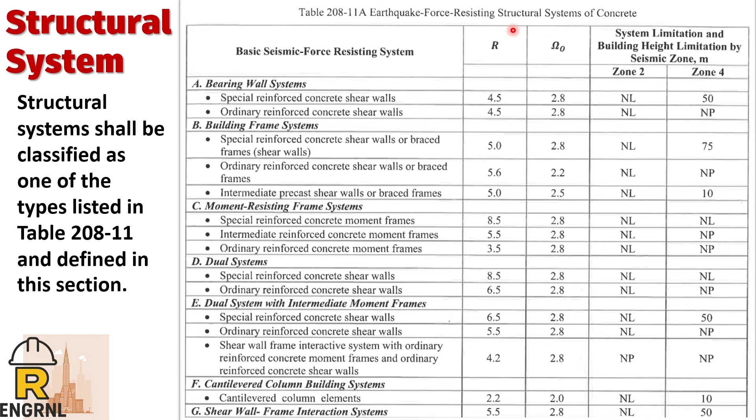So, structural system shall be classified as one of the types listed in Table 208-11. So, meron tayong bearing wall, building frame, moment resisting, dual system with intermediate moment frames, cantilevered column, and shear wall frame. Yeah, and usually nga, ang ginagamit natin is the special reinforced concrete moment frames or yung 8.5 na R sa pag-compute ng earthquake parameters. Isa-isahin muna natin i-introduce ito sa inyo para maging familiar tayo.

So yung una is bearing wall system. The structure without a complete vertical load-carrying space frame. Bearing walls or bracing system provides support for all or most gravity loads. So kinuha natin to sa NSCP as reference, itong definition mismo ng NSCP. In short, yung bearing wall mismo ang nagkikerry ng load. Sample of bearing walls ay yung shear walls, no? Doon sa floor na lahat ng gravity loads ang dinadala niya. Resistance to lateral load is provided by shear walls also and brace frames. Okay? So, madalas itong ginagamit sa mga high rise natin.

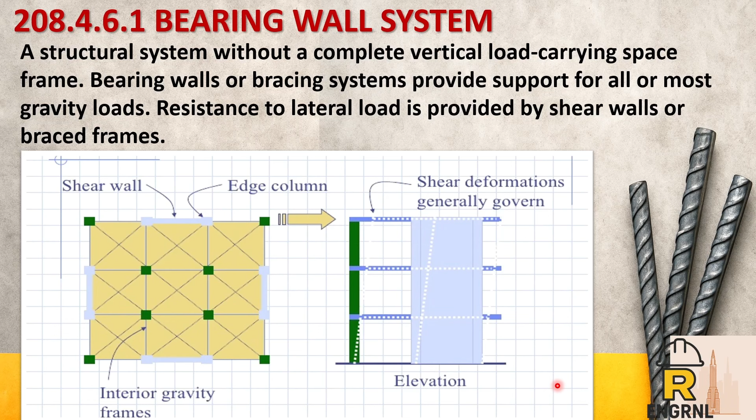Pangalawa nga is yung building frame system. A structural system with an essentially complete space frame providing support for gravity loads. And resistance to lateral loads is provided by shear walls and brace frames. So, technically, meron din siyang shear wall. Pero unlike the bearing wall, kasi ito, bearing wall is load-bearing walls na tinatawag. Meron kasing non-load-bearing walls. So dito, wala tayong specific na load-bearing walls, pero may shear walls for lateral load. Technically, ang nagbubuhat dito ay yung mga beam to column frame na.

Okay? So a building frame system is a system in which the gravity loads are carried primarily by a frame supported on columns rather than bearing walls. Ayan yung sinabi ko. So some minor portions of the gravity load may be carried on bearing walls, but the amount so carried should not represent more than a few percent of the building area. Okay? Kadalasan din itong makikita sa mga buildings with elevators. So ito na yung pangatlo na madalas talaga natin ginagamit.

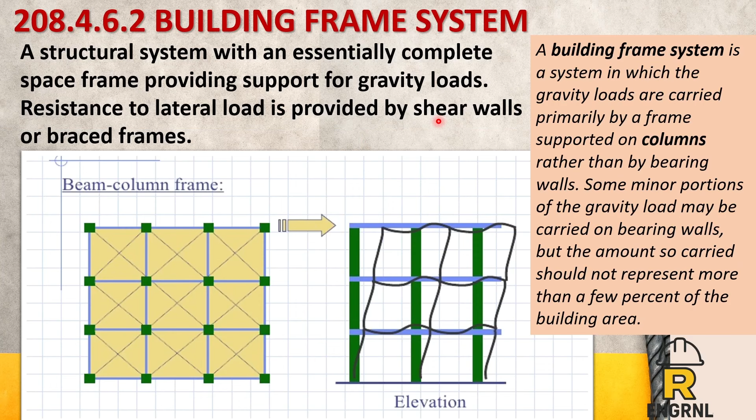So, structural system with essentially complete space frame providing support for gravity loads. A moment resisting frame. So, para rin siyang general under the building frame system. Pero this time is, from the word itself, moment resisting. Moment resisting frames provide resistance to lateral loads, primarily by flexure action of members. Kung dun sa building frame system, yung lateral load, inaasa natin sa shear walls. Dito, kahit walang shear walls, may resistance tayo sa moment. And nagkakaroon lang naman din ng moment kasi due to lateral loads, di ba?

So, the horizontal beams and vertical columns provide support for the structure's weight and the strength and stiffness needed to resist lateral loads. So, stiffness and strength are achieved through the use of rigid connections. So, lagi ko sinasabi yan, when the connection is rigid, you can call it moment resisting. May tatlong force dyan na general force: axial, shear, and moment.

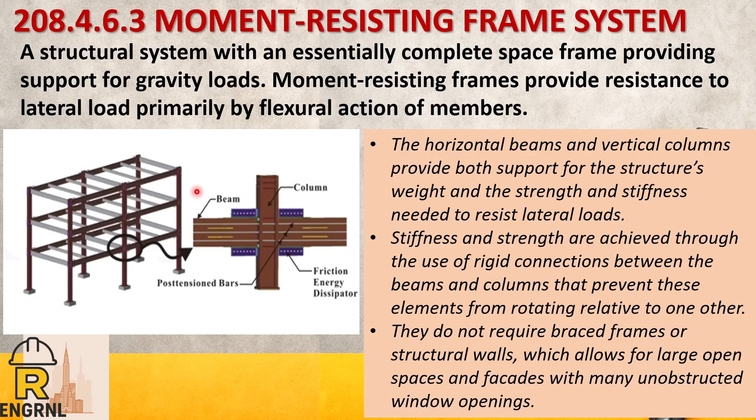So, they do not require braced frames or structural walls, which allows for large openings and facades, which is one of its benefits. We have more possibility of good architectural works, no? So, yun. Because from the skeleton of the building, we already provide the strength there. I mean, the loads, we let them carry it.

So, there are three types of moment resisting frame: ordinary, intermediate, and special. Okay? So, by definition, ordinary is a frame not meeting special detailing requirements for ductile behavior. This provides the least resistance to lateral motion. So, if the building is just a one-story building, we can use an ordinary moment resisting frame.

Second is the intermediate moment frame, a frame designed in accordance with Section 412, concrete diaphragm. We have a diaphragm, meaning there are horizontal elements provided to resist limited inelastic deformation as the result of lateral forces. So, technically, it can be used up to 2-story, and buildings or structures with horizontal elements.

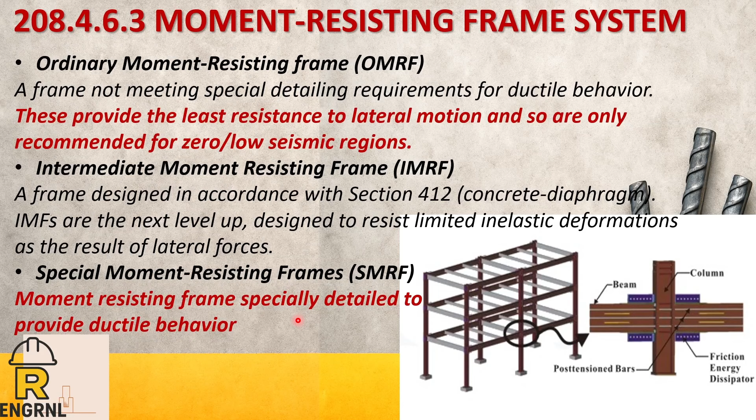And lastly, the special moment resisting frame, specially detailed to provide ductile behavior. We study this because when you use design software, there are options asking whether to design by ductile design or not. So, we provide ductile design for buildings 3-story and above. Technically, for all, if we want a higher factor of safety, we use SMRF in our design.

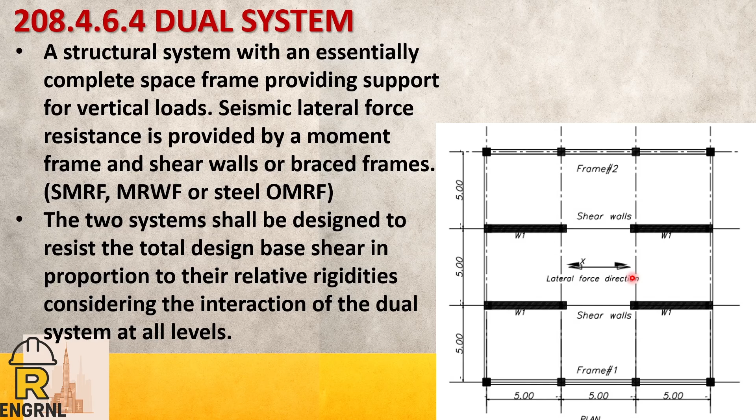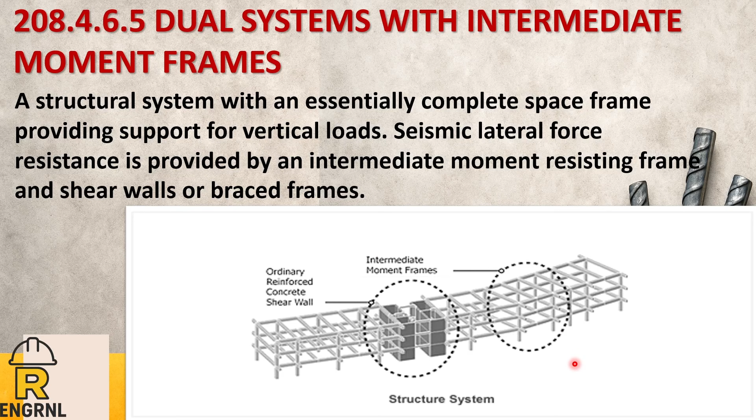We also have the dual system. From the word itself, dual, a combination of moment frame and shear wall or braced frame. Again, a moment frame together with shear walls or braced frame. The dual system is often used in high-rise buildings. There are shear walls, and there's still SMRF. Then, we also have the dual system with intermediate moment frames. This is the example, usually in large infrastructure.

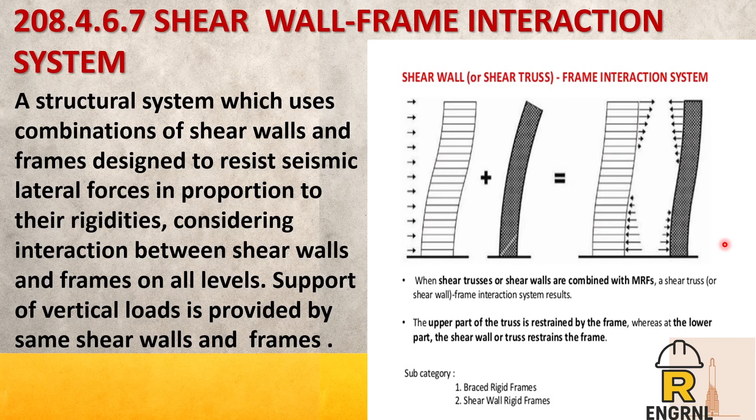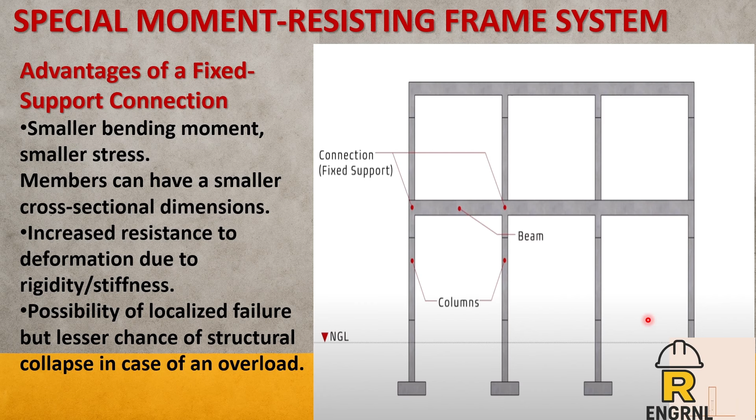The advantages of fixed supports, why we use fixed supports: smaller bending moment, smaller stress. Members can have smaller cross-section dimensions. Increased resistance to deformation due to rigidity, and the possibility of localized failure, but a lesser chance of structural collapse in case of an overload. So, this is typically what we use. So, now the seismic design and detailing of SMRF.